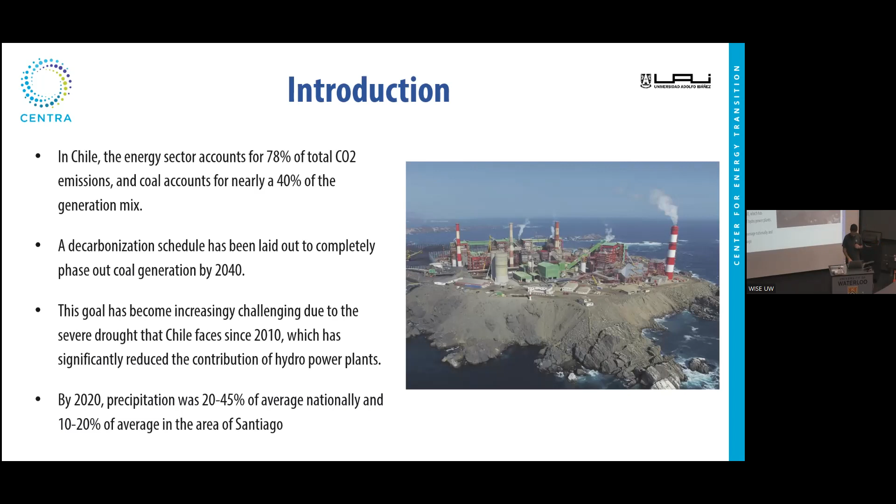And actually, by 2020, the precipitation we observed in Chile was 20 to 45% of the national average on the all-time records, right? And in Santiago, we averaged between 10 and 20% of the average precipitation over the whole horizon that we have records. So it's a very extreme drought.

So this process of phasing out coal poses several questions. These are all valid questions being asked by many politicians and journalists in Chile all the time. Are we going too fast? Are we trying to phase out coal too fast, and therefore paying too much for something that's not necessary? Are we risking security of supply because of phasing out coal so fast?

We actually had this concern earlier this year because we decommissioned two large coal-based power plants, and because of the drought, the independent system operator estimated a significant chance of facing insufficiency in electricity supply. So some politicians were trying to go back and relaunch the power plants, but that was not possible. Or maybe we should be going faster. Maybe this is not fast enough. Maybe we should go even beyond the coal phase-out,

and also be looking at gas. Anyway, all these questions cannot be addressed from a single perspective and are largely, in my opinion, a matter of political consensus. However, there are some questions we can formulate from academia that can help the discussions. The question we try to answer is: how do different decarbonization pathways impact the Chilean electricity system in terms of operational features and costs? This will inform policy decisions. In what follows, I will discuss the methodology, models, and case studies we formulated to answer this question.

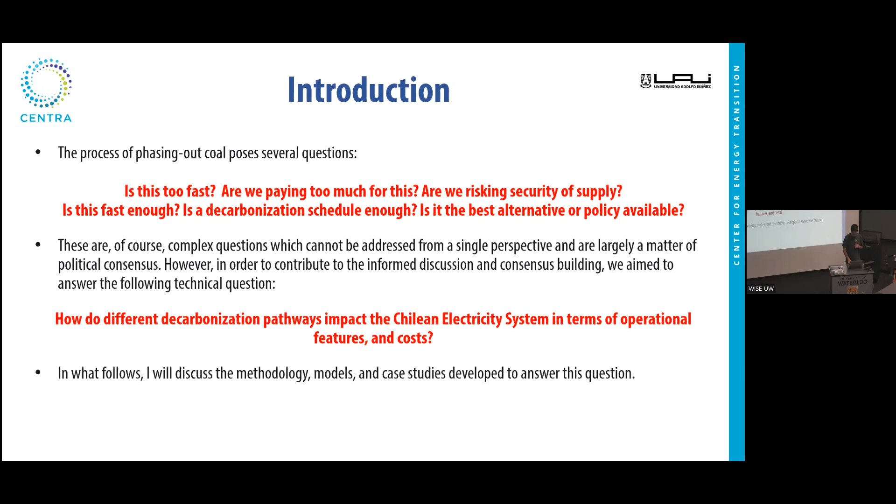But first, let me tell you about this strong link that needs to be represented in any planning model that tries to forecast decarbonization, which is the connection between decarbonizing our electricity systems and providing flexibility, right? In Chile, as I mentioned, phasing out coal is a significant challenge because it currently represents 40% of the generation mix. In 2020, nearly 40% of the generation in a year was coal.

So together with this decommissioning of coal generation, we also see significant growth of renewable energy sources, which are expected to support emission reduction. And the combination of these two creates a need for flexibility, right? Because we have fast ramping up and down during the day, and seasonal variations in renewable availability. But if we don't have coal and we don't have gas, then we're not going to be able to deal with such variability, right?

We need to be able to store energy, either as a fossil fuel or in energy storage, to compensate for these variations in renewables, which are the sources that will support our transition towards low emission systems. So flexible technologies such as storage can play a crucial role in the reliability of this decarbonization process.

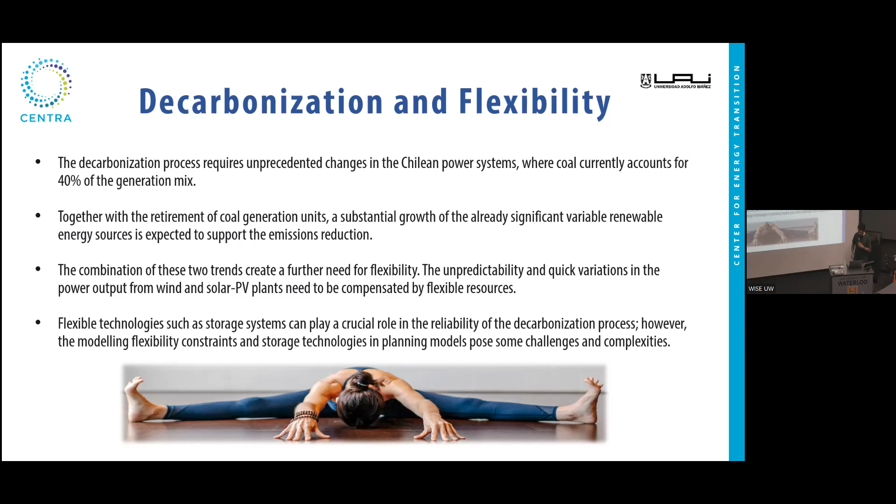However, if we look at the typical models available for planning purposes, we don't see constraints representing flexibility. Flexibility is typically associated with operational constraints. And most planning models don't even use hourly time resolution; they just use energy blocks. So there's no way of seeing flexibility constraints in classical planning models.

So this is how we address the question. First, we employed a state-of-the-art expansion planning model, which I'll tell you more about in a few slides, to analyze three base decarbonization scenarios considering flexibility requirements. The first scenario is phasing out coal by 2040, which is the current policy in Chile. We also tested two accelerated decarbonization scenarios: D35, decarbonizing by 2035, and D30,

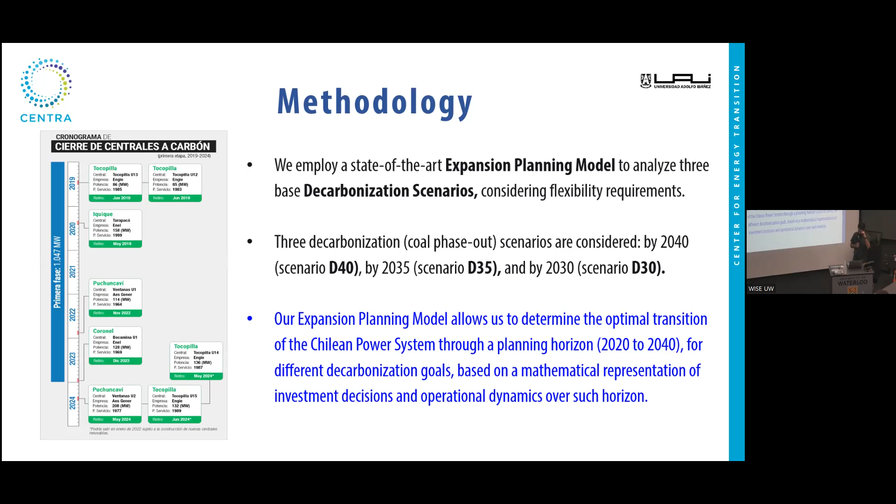decarbonizing by 2030. Our expansion planning model allows us to determine the optimal transition of the Chilean power system through the planning horizon between 2020 and 2040 for different decarbonization goals, in particular those three, based on a mathematical representation of the investment decisions and operational dynamics over that horizon.

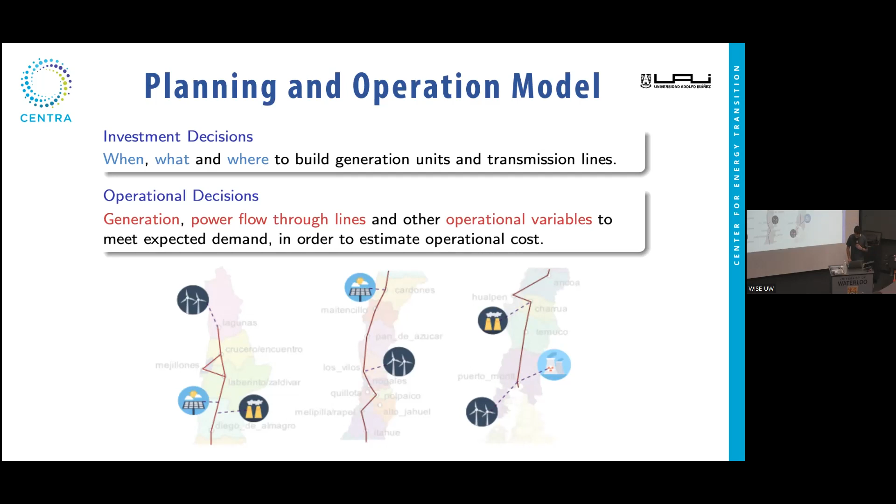So basically what our model does is to decide when, what, and where to build generation units and transmission lines. And in terms of operational decisions, it decides how much to generate, which are the power flows over the lines in the transmission system, and other operational variables to meet expected demand in order to estimate operational costs. And I'm going to give you more details about that in a minute.

So our expansion model models planning and operation, and was an extension of the switch model, which is a planning model developed at UC Berkeley, maybe 10 years ago. It was oriented to the energy sector in general, not only electricity. So it had a very rough modeling of the electricity production and transport and consumption, I would say.

We worked on that model with several master and PhD students, and we managed to upgrade it to include representative days, modeling of storage facilities, detailed modeling of concentrated solar power plants. That's all uploaded to the switch model that you can find now in their website. So if you go to the switch model website and download, which is an open source model, you will see many of the upgrades that we developed for this project throughout almost 5 years.

So the model determines the optimal investment decisions from a central planner perspective in a long-term horizon. We can use 30 years, we use 20 years in this case, but it's highly customizable, right? This is important to say. In Chile, generation is not planned centrally, right? It's an investor decision, it's a private decision.

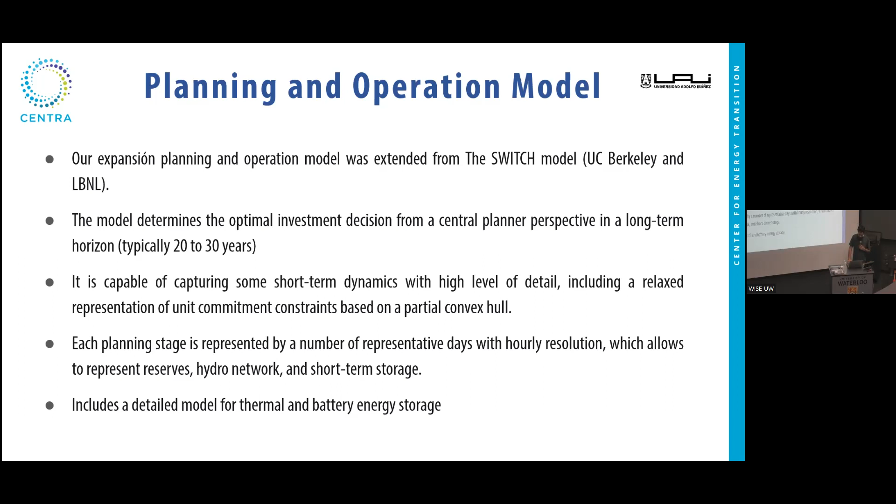Each planning stage is represented by a number of representative days with hourly resolution, which allows us to represent reserve requirements, the hydro network, and short-term storage. And we have detailed models for thermal and battery energy storage systems.

We have a model of the Chilean network. This is Chile cut in 3 pieces. I have to put them all together to see Chile, but there is actually a few thousand kilometers south of this point. This is Puerto Montt, which is the southern end of the Chilean central electricity system. Right? We have a few medium-sized electricity systems south of that, but this is the main system.

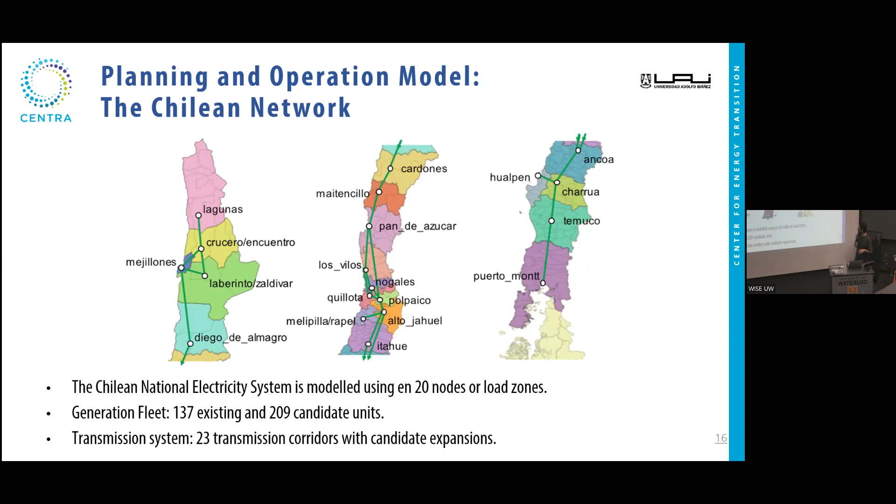We model Chile with 20 nodes or load zones, which is actually the standard way of modeling Chile for this type of studies by the National Energy Commission or the Ministry of Energy. This is not a toy model. This is state of the art with the actual size of the system. We have a generation fleet of 137 existing units and 209 candidate units to be installed over the horizon. In terms of the transmission system, we have 23 transmission corridors with candidate expansions, each of them.

The hydro network is very tricky and it has to be modeled because it poses several operational constraints to the Chilean electricity system operation. In particular, it's very connected in a sense that you have a whole basin of a river with several power production facilities downstream, and the production of all these facilities are of course linked because the water that you use to generate upstream is the same water that then is available for generation downstream. So there's a time coupling in the operation of this system that needs to be represented.

And there are also what we call the irrigation agreements, which tell us how much of the water available each year we can use for actual power production and how much we have to save in the dams because of irrigation purposes.

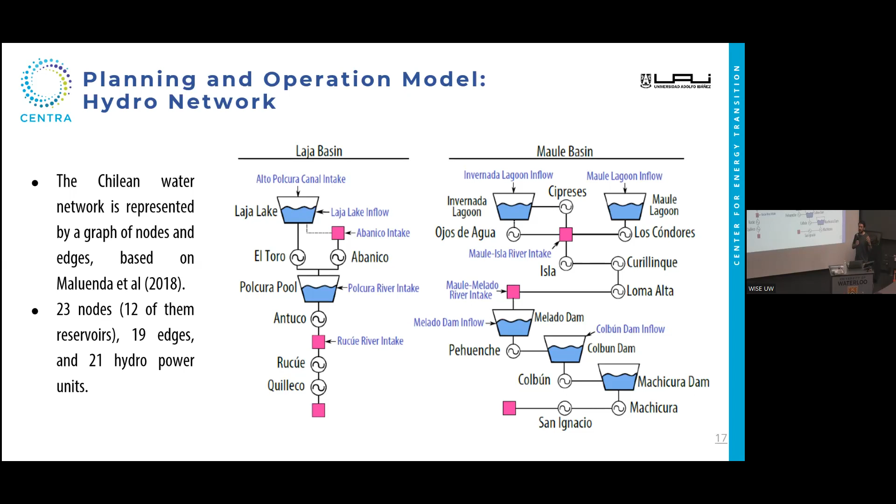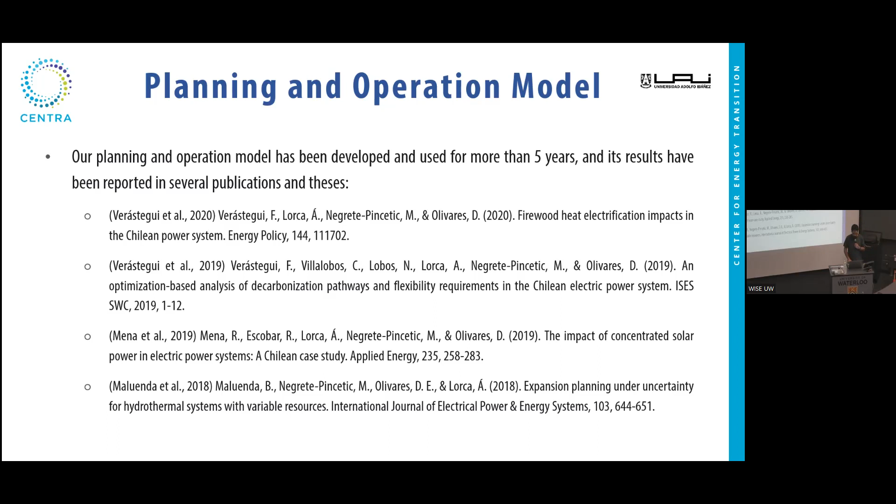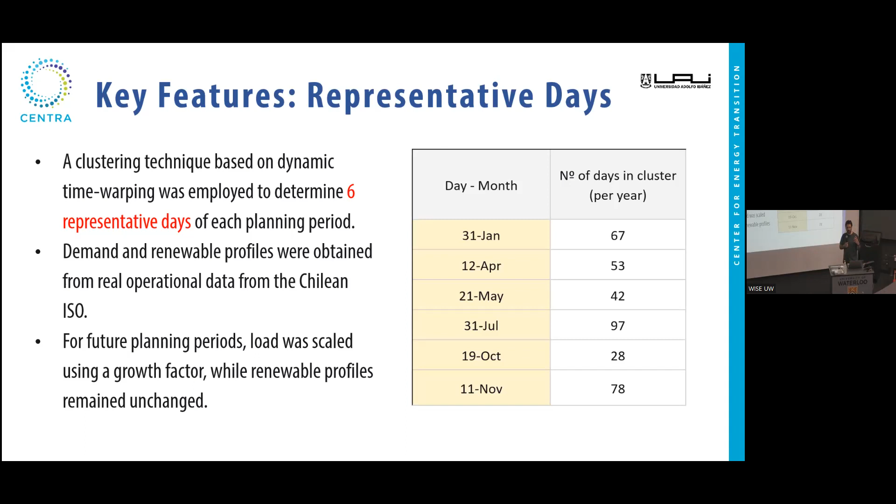Demand and renewable profiles were obtained from real data from the Chilean independent system operator, and for future planning periods, the load was increased in the same shape by a growth factor. And for renewables, we also ran several sensitivities with different growth factors. I'm not going to show all the sensitivities that we ran, but we did a very thorough sensitivity analysis. And the renewable profiles remain unchanged over the horizon. So we assume that the pattern of renewable production is going to be the same. We just increase the capacity.

We included these flexibility constraints, which specifically means we included ramping constraints for our units. We included minimum stable levels, as a relaxed constraint, because to actually represent minimum stable limits, you need a binary variable to decide whether the unit is on or off, right? So if it's on, it has to be more than 50 megawatts or so. If it's off, it can be 0. And we also represented minimum up and minimum down time constraints for thermal units.

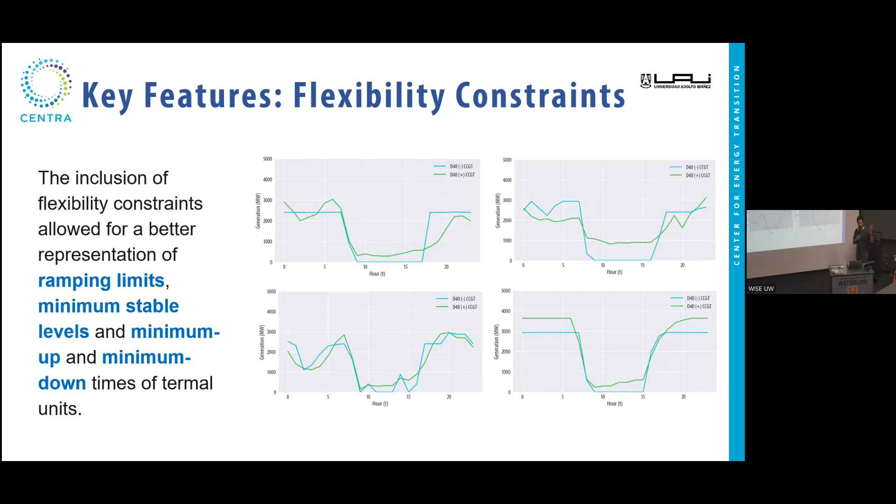If we do, in a relaxation, of course, it's not an exact representation, we see the green line, where we can see that the unit, for example, in this valley, is not turned off. It goes to minimum power, because it cannot be turned off if you want to turn it on a few hours later. Okay, so this somehow accounts for the fact that these units are not very flexible. You cannot turn them on and off during the day at will.

We used a variety of sources, official sources from the government and the independent system operator, to determine the sets of candidate generation units and candidate transmission lines. These are a very realistic set of possible investment decisions.

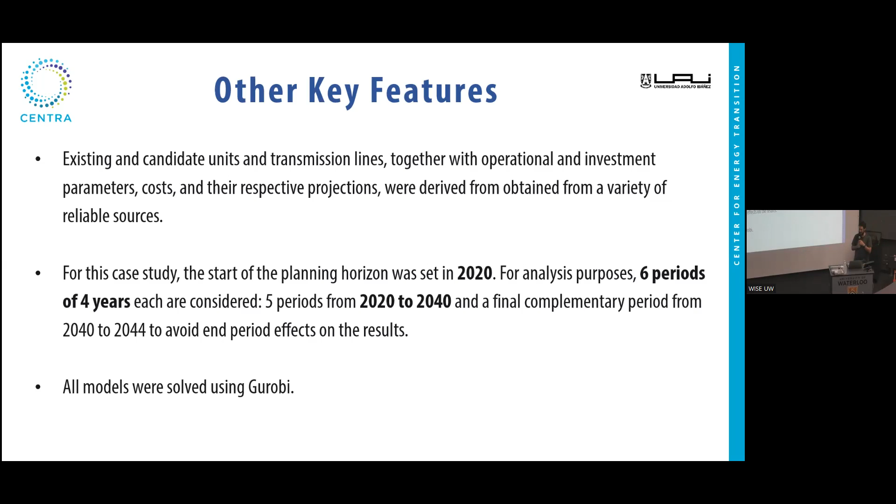We set the starting planning horizon at 2020 for this study, and we used 6 periods of 4 years. So we made investment decisions every 4 years. We have 6 periods to cover the whole horizon. 5 periods go from 2020 to 2040, and then we had a complementary period from 2040 to 2044 in order to avoid the end period effects that sometimes you see. If you end at 2040, then the investment decisions in 2040 don't make sense, because there's no future to plan for, right? All models were solved using Gurobi.

We would also end up spending much more money on new generation because we have to accelerate the investments, do investments in generation much earlier, which are going to impact more in the net present value, of course. We end up paying much more. We didn't see much of a difference in terms of transmission assets. Investment is mostly the same. And well, in terms of generation fuel consumption, of course, if we decarbonize earlier, we get lower costs.

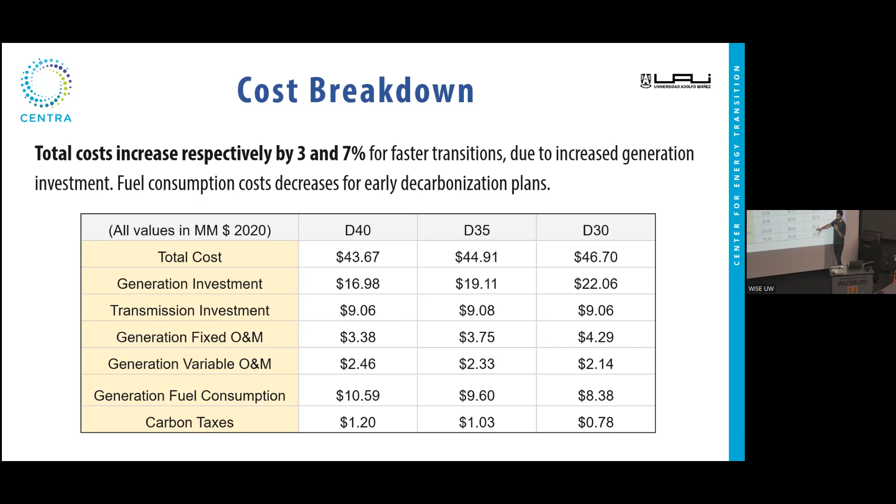We also see that all scenarios consider a significant growth in variable photovoltaics and wind capacity. Photovoltaics is the yellow segment, and wind is the light gray. And also we see that this increase in variable renewables motivates new entrants of CSP, which goes with thermal storage, and batteries. Oh, batteries is the first one. So they start to appear as we increase the penetration of variable renewables, but mostly CSP.

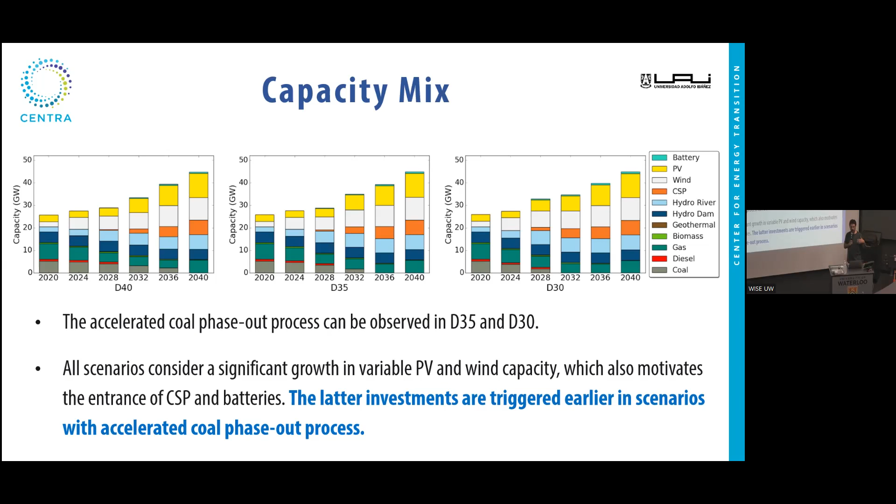This was actually an interesting result because in all the previous analysis, CSP wasn't a big player in the future energy mix in Chile. This was the first study, and mainly because of modeling the flexibility requirements, that CSP started to show up in the future energy mix. This CSP is concentrated solar power.

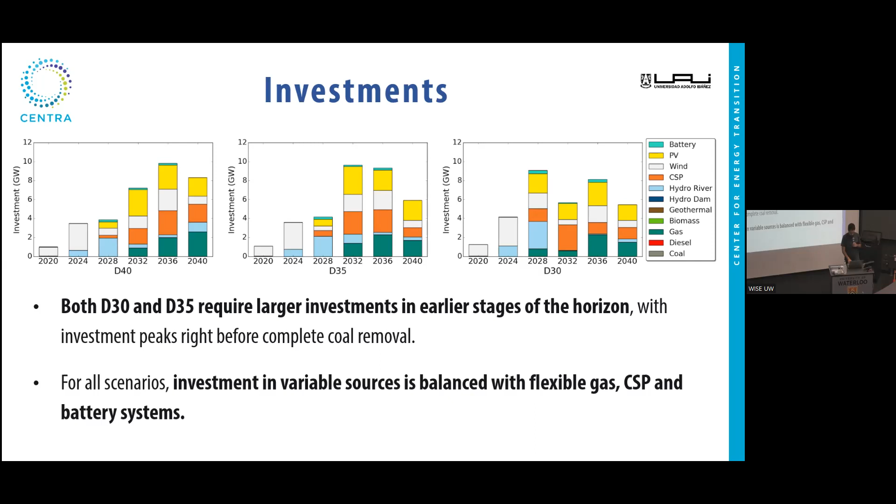For all the scenarios, we can see that investment in variable sources is balanced with flexible gas. So gas plays a significant role in 2036 and 2040, because we cannot get rid of it if we don't impose it, because it's a flexible resource that's going to help us manage variability of renewables. And also CSP and batteries, which are the other highly flexible resources available in the system. When we see gas, it represents gas turbines, which are very flexible, but also combined cycle gas power plants, which, because of the steam turbine, are not that flexible.

This is in terms of generation mix. So we see that CSP, in all the cases, plays a significant role by 2040, which is the orange or salmon color. PV is not that big though. So we would expect that PV in Chile would be a much bigger player in the future, but we're not seeing that. The reason is because it's far from the load center.

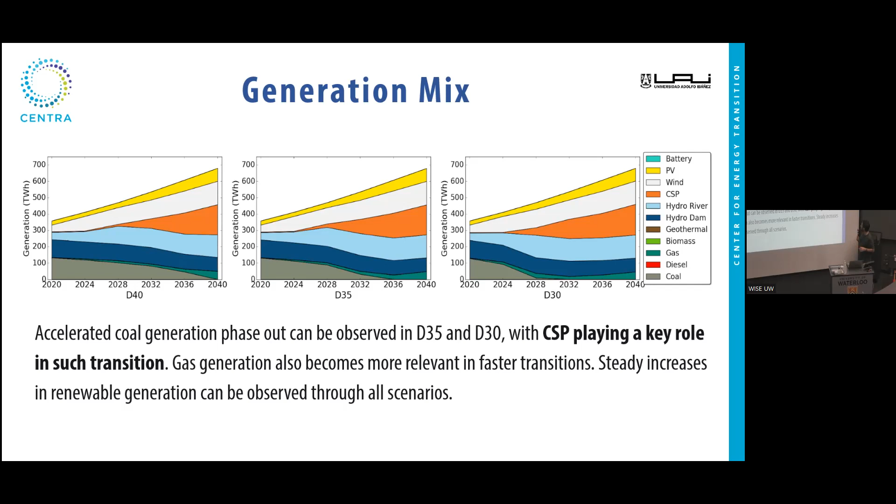So it involves a higher investment in transmission, but also it requires a lot of storage to handle intraday variations, day-to-night variations in PV. That's not the case with wind, where it's still variable, but more stable throughout the day. So we see more wind than PV integrated in the Chilean generation mix.

This is the difference in the generation mix that we see in 2020 and in 2040 for the scenario where we decarbonize by 2040, so phasing out coal by 2040. What we see here is a large increase in variable renewable energy. It grows 14.3% of the total generation mix. So basically PV from 7.1 to 11.7 and wind from 11.3 to 21.0.

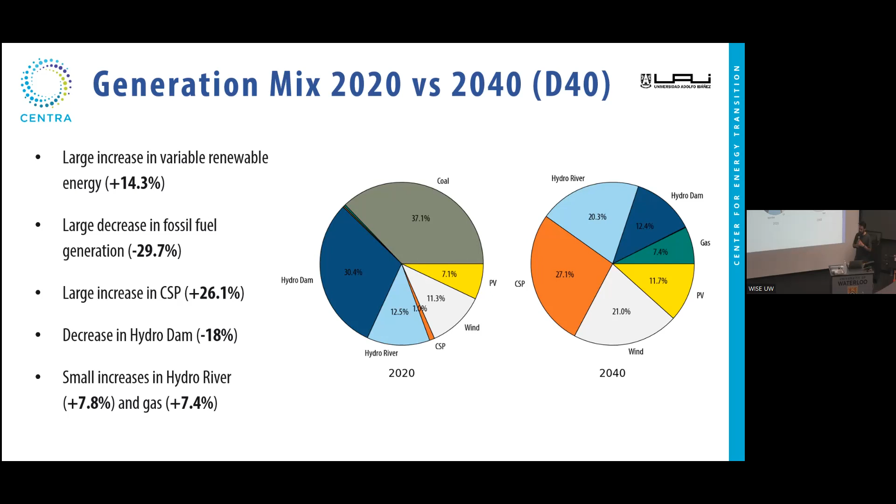We also observe a large decrease in fossil fuel generation because we are phasing out coal. Of course, we see a drop of almost 30%, mainly because of the coal generation reduction. We also see a decrease in hydro dam generation because we are not building new hydro dam power plants in the horizon, so proportionally it represents a much smaller fraction of the total generation. And we also observe small increases in hydro run-of-river generation; there are still a few basins that we can use for that in Chile.

This is the power system operation in 2020. You see, for example, in several days, coal represented almost 50% of the generation. Some PV solar generation was appearing here, and the variation was compensated by gas power plants. For example, here, gas appears right after the peak of solar to compensate during night. So I guess we can see from this that the big challenge next after phasing out coal is going to be phasing out gas, because it's providing a large share of the flexibility that we require.

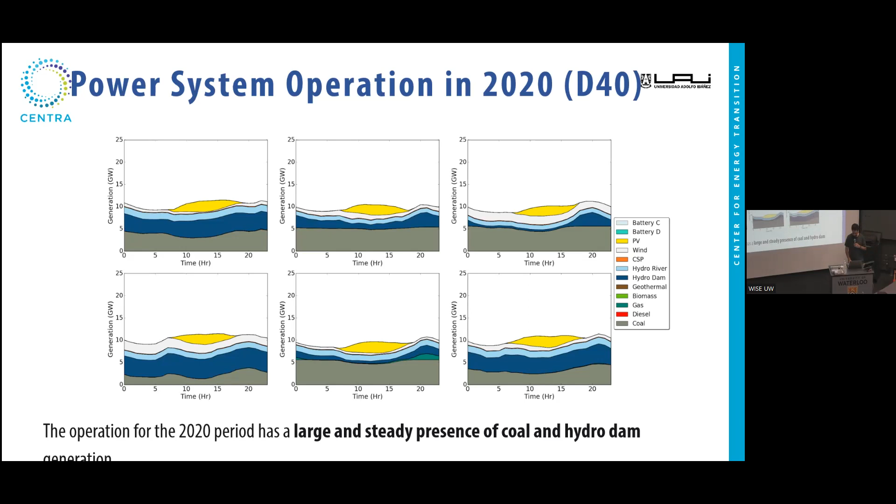Okay, and this is how 2040 would look like in the scenario where we phase out coal by 2040. So there's no coal generation in this slide. We can see that PV is a very significant resource during daytime. We can also see that CSP production is very stable throughout the day. Basically, CSP replaced coal as base load generation because of the thermal storage capabilities. Hydro run-of-river is also significant.

And we can see also a hydro dam role that is not the one it was playing 10 years ago, which was base load generation. Now it is becoming a contributor to power system flexibility. So it stores energy during the day, and then at night, it provides the power that PV solar is no longer contributing.

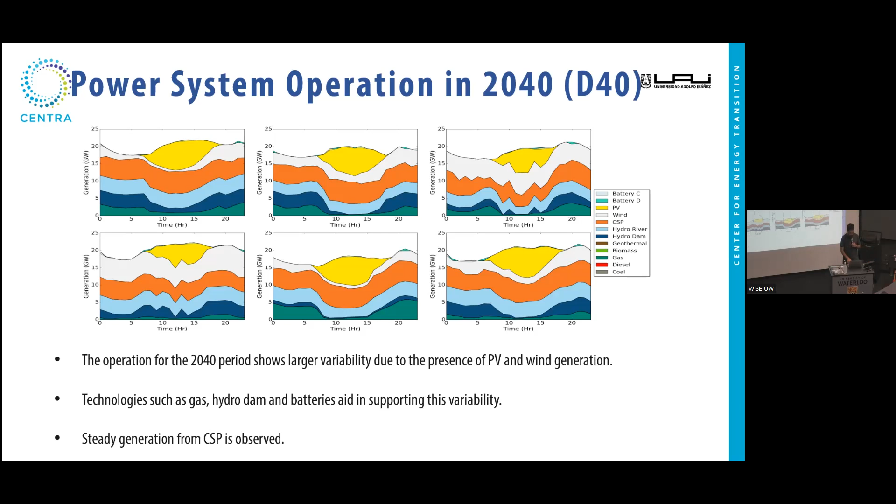This is a thermal storage cycle in 2040. In the scenario where we phase out coal by 2040, we see that thermal storage further emphasizes the role of CSP in providing carbon-free baseload generation by 2040. It's being charged during sun hours and then discharges power during the whole day. So this is production, and this is thermal energy storage.

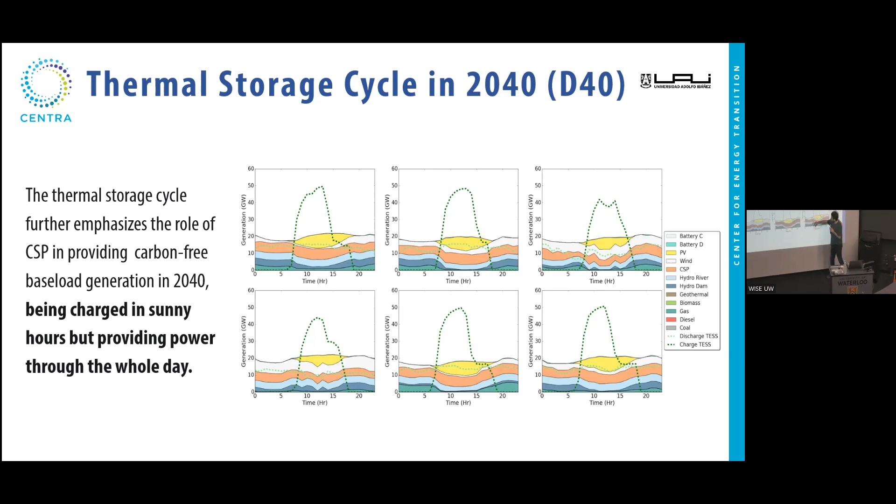And this is how CO2 emissions look in the three scenarios. So this is the one where we decarbonize by 2040. If we decarbonize by 2035, it drops much faster, and by 2030 also. So we see that the main CO2 emissions nowadays in Chile are from coal. So the policy is right by phasing out coal generation first. But the next one is gas.

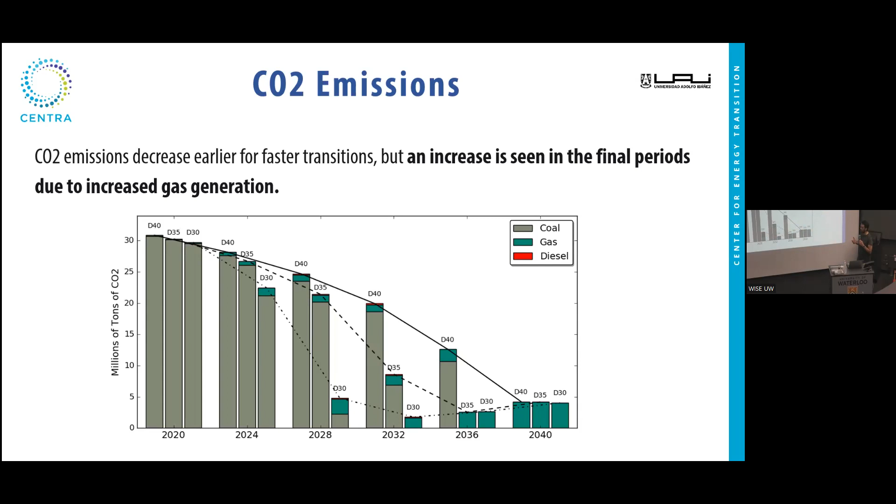And an interesting thing we observe here is that if we don't do anything, then we reach record low CO2 emissions from the electricity sector in 2036. But then in 2040, we start seeing an increase because gas production starts increasing to accommodate more renewables.

So let me show you now what happens if we didn't model flexibility. These are the results of the state-of-the-art model with flexibility modeling, but what happens if we didn't model flexibility, which was what everybody was doing in Chile right before we launched this study. So we tried 3 different scenarios, which are D40 minus, D35 minus, and D30 minus. The only difference is that in those scenarios, we relaxed all the operational constraints that represented flexibility. That means no ramping constraints, no minimum power constraints, and no minimum up and down constraints.

So first, in terms of cost, of course, our model without those constraints is a relaxed model. So it's going to end up being cheaper in the model. That doesn't mean it will be cheaper when we actually operate the system under those conditions; it's expected to be higher, right? The model tells us that it's lower because we have fewer constraints.

In terms of generation investment, we also see that our model with relaxed flexibility constraints tends in scenario D40 to invest more. We will see that is because it overestimates the capability of the system to integrate PV, right? Because it doesn't account for flexibility constraints, it thinks it can integrate more PV than it actually can efficiently.

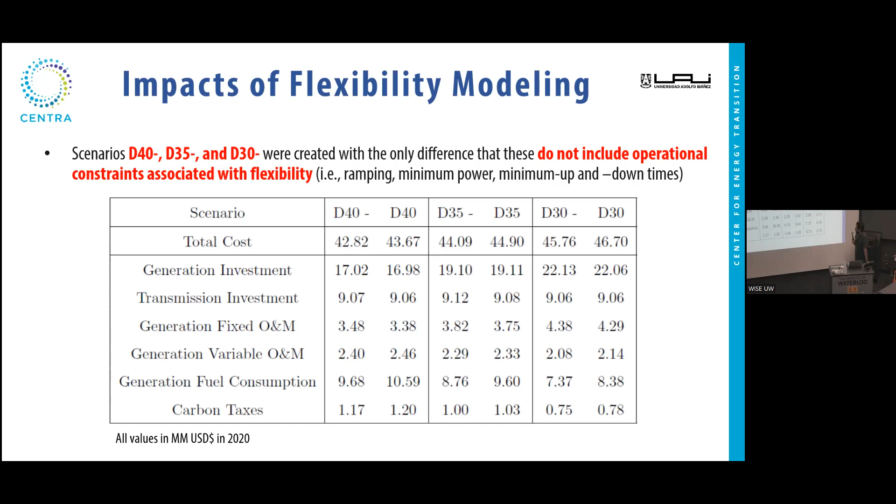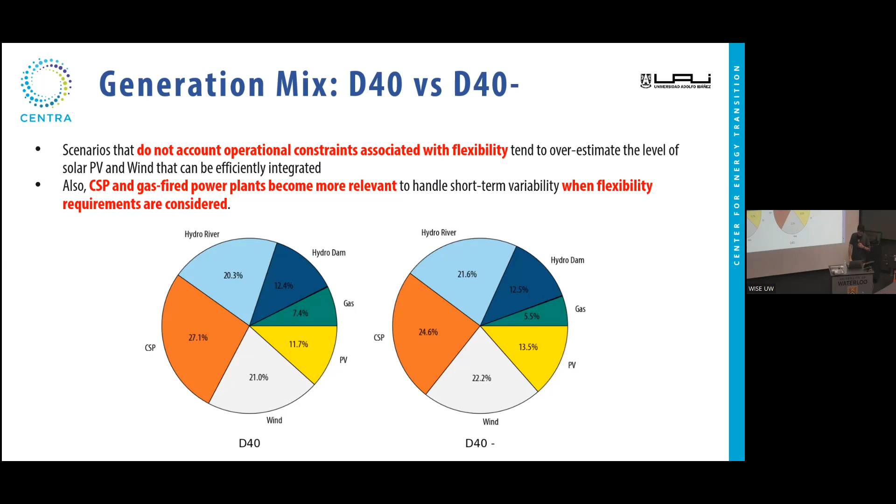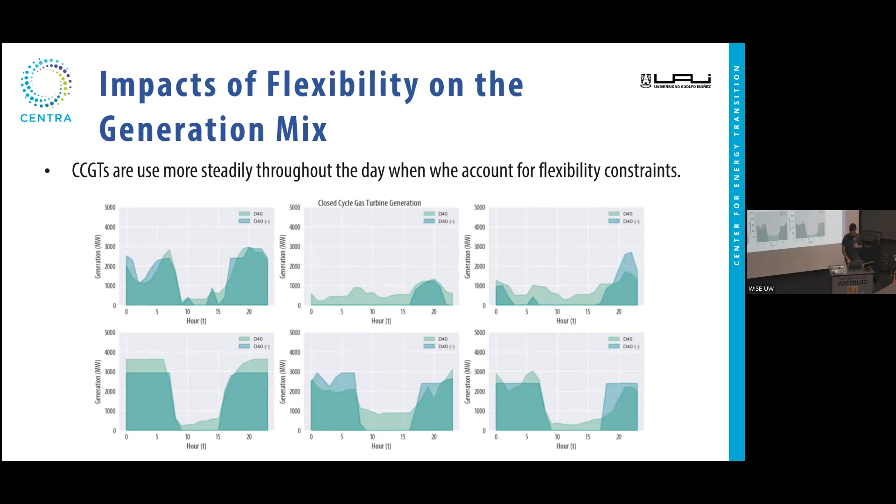In terms of CSP, when we model flexibility constraints, we gave the model three alternatives for CSP thermal storage: 17 hours, 13 hours, and 9 hours of thermal storage. The choice in the model where flexibility wasn't an issue is that 13 hours was the perfect storage capacity, because it's exactly the time when we mostly don't have sun, right?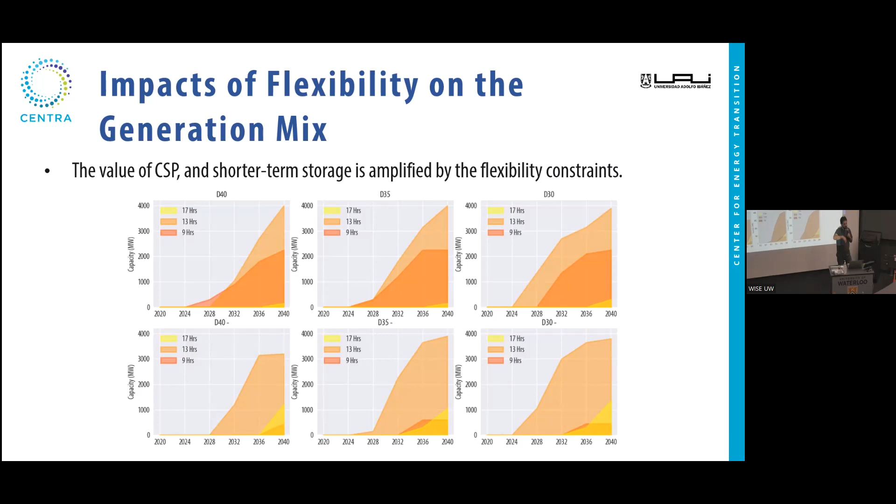So we just need to accommodate the sun that we generate during daytime to nighttime. But when we do model flexibility, that means that we have to be doing this with CSP, then we require more shorter term energy storage, which is the 9-hour energy storage, which we don't observe when we don't model flexibility, right? So the efficient decision when we do model flexibility is to have shorter term energy storage to accommodate for this intraday variability.

And then we said, okay, what happens if we go 100% renewable? Are we doing okay in time? Yeah, we're running out of time. Okay, just 5 minutes.

Perfect. Okay. So what happens if we go towards 100% renewable energy mix? So what we did is to create 3 new scenarios, D40 star, D35 star, and D30 star, which are phasing out coal by 2040, 2035, and 2030, but also imposing a 100% renewable generation constraint by 2040 in all of the scenarios. Right? So decarbonizing by phasing out coal by the corresponding time, but then 100% renewable energy mix by 2040.

And what we observed is that, of course, imposing 100% renewable is going to cost us money. For example, if we aim to phase out coal by 2040, but also making it 100% renewable, it costs us $350 million. It's not that much in net present value. So imposing that constraint is not that expensive. It's actually a reasonable constraint, we believe, to impose a target for 100% renewable by 2040.

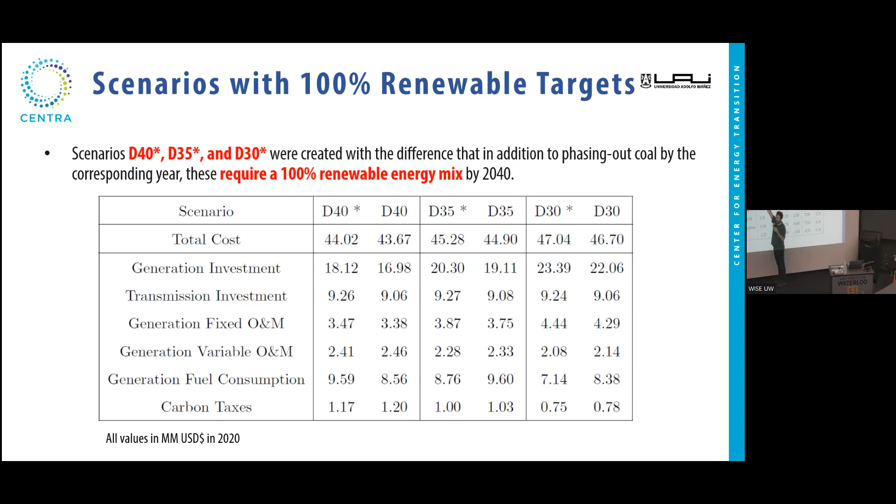In terms of generation investments, of course, it involves more money because we're not just phasing out coal, but also gas, which was a significant player in all the solutions in the base cases. So the role of solar PV is significantly reduced in the case where we impose 100% renewable. Why is that? Because here we had the gas to compensate. If we don't have the gas, then we cannot integrate the PV reliably.

And that means that we need solar plus storage, which is cheaper when we combine them in a concentrated solar power. These results might change quite a bit if we assume a different trend of cost for electrochemical storage, energy storage, right? Because we can also have a combination of PV plus ESS, which would fulfill the same role as CSP, right? So these are highly sensitive to those assumptions, but we do need a lot of storage if we wanna be 100% renewable.

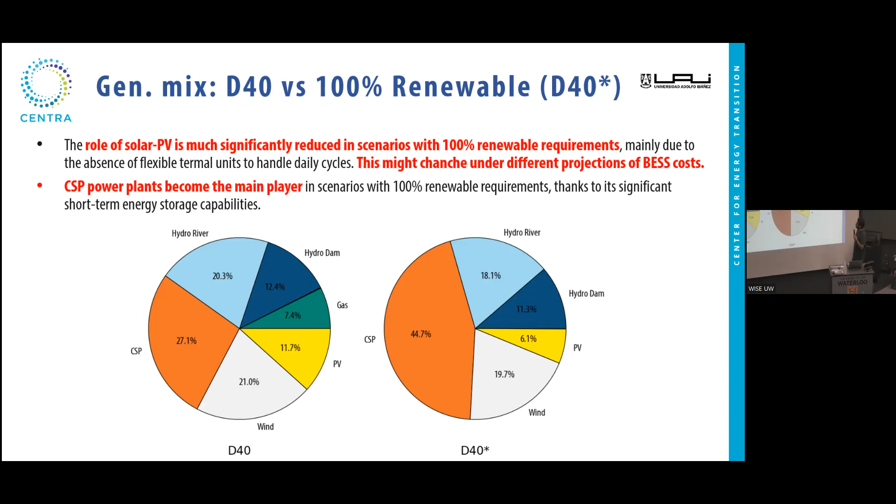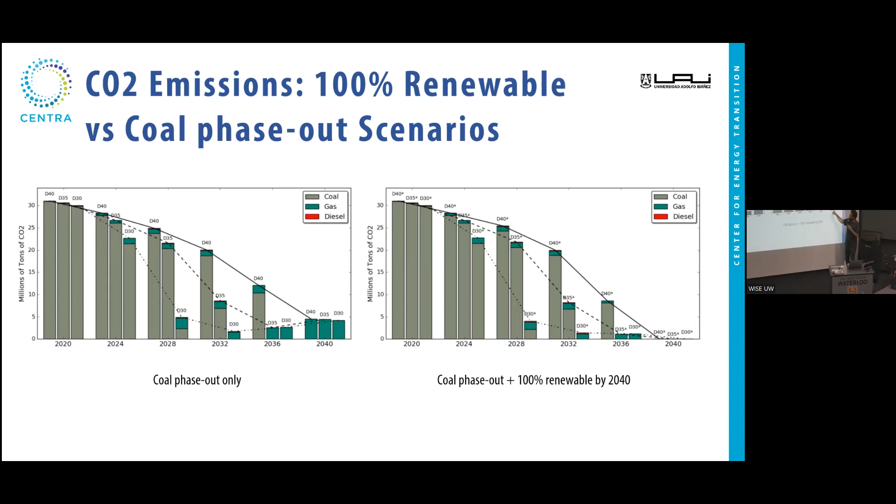And this is what happens in terms of CO2 emissions. So in this case, we reduced coal much faster in the case of D30, right? By 2032, we don't have CO2 emissions coming from coal. We still do have some gas, but it drops down to 0 in all the scenarios because that's what we imposed in the end.

Okay, so let me tell you a few final remarks. First, the decarbonization of the electricity system creates key challenges in terms of procurement and operation of flexible resources, as we could observe. Under all scenarios, a large adoption of variable renewable energy is expected, but this requires flexible generation technologies such as CSP, which was the major player in our analysis, or batteries if they become the efficient option to replace that.

Accelerated decarbonization processes present higher costs, of course, because they are more stringent constraints, but it's not that much. In net present value between $1.2 and $3 billion. We're actually nowadays discussing the creation of a price stabilization fund, which is going to be $2 billion created out of the pocket of the consumers. So paying that extra to phase out coal much faster is not that significant for the Chilean system.

The increase in CO2 emissions in the final periods of the planning horizon where we don't impose 100% renewables should be addressed, right? Because the final goal is to decarbonize, meaning zero CO2 emissions, not just phasing out coal. So if in the end we see an increase of CO2 emissions because of gas, that's something that should be addressed with a specific policy.

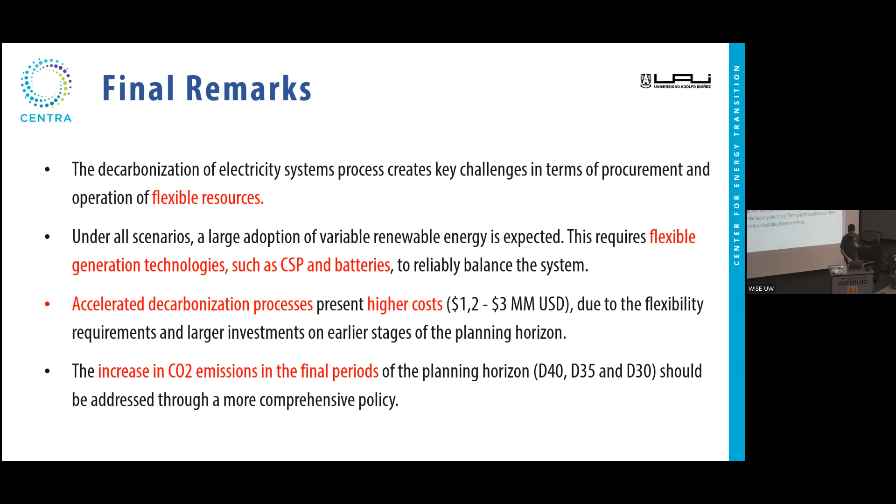We also observe that the use of planning models that do not model flexibility aspects might hide the value of flexibility resources and therefore delay their consideration in relevant policy and regulatory decisions, which is what we observed in Chile from a decade ago until now. But now decision makers are realizing this, and they are pushing forward new measures in terms of new regulation and market adjustments, so that there's a higher motivation in terms of returns for these investments.

It becomes then highly relevant to analyze the implications of the flexible resource requirements for decarbonization in the design of regulation and markets. In particular, one thing to observe is price formation. Like, are we setting the price to the actual?

There are different ways to set the price of the energy market, accounting for different constraints. So it's important that flexibility constraints are somehow accounted for in the price formation, so that the players that can contribute flexibility get returns on that, get the incentive.

And also there are challenges in the effective placement of flexible resources, in particular storage. That's something that we're looking into now, because this model doesn't have the locational details that allow us to say, okay, this is how much storage we need, but where exactly? For that, you typically need a better modeling of the transmission constraints to see how the flows are going to be distributed in the system. This is just a transportation model for transmission. We need a model that accounts for Kirchhoff laws, right? To decide where.

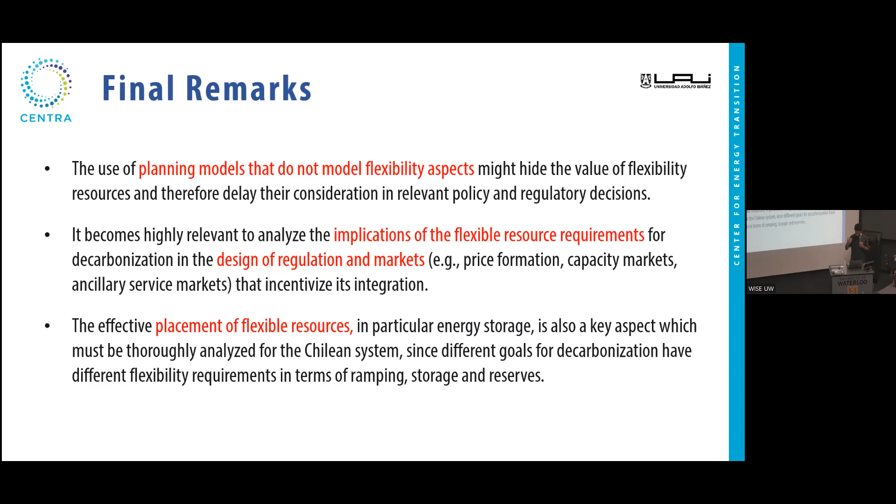And also there's a decision to make of how big the converter has to be to provide voltage support, and how big the actual energy storage has to be to provide this flexibility, right? That's it. Thank you very much.